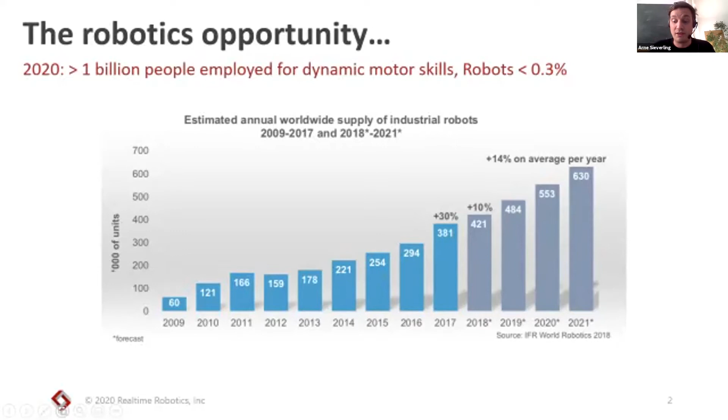If you now look at the actual deployment cost of a classical automation work cell, let's say a cell doing a step in building a car, the majority of that is actually integration. It's people that write the software, write the robot programs to solve a very specific task. So the normal workflow of these applications is done by companies called integrators, specialized in just that, getting these robots together. They design the environment and create high-level task plans.

Then they create motion plans, usually manually by teach and repeat, just moving the robots into positions. They get those taught positions onto the robot program controller and test and iterate. The last steps here are more like an iterative process, because the real world usually is different than the designed environment you started out with. So these people go into the factories, run the plans at low speed, check for potential collisions, adapt the plans. This is all a very time-consuming process, and it requires a lot of specialist knowledge.

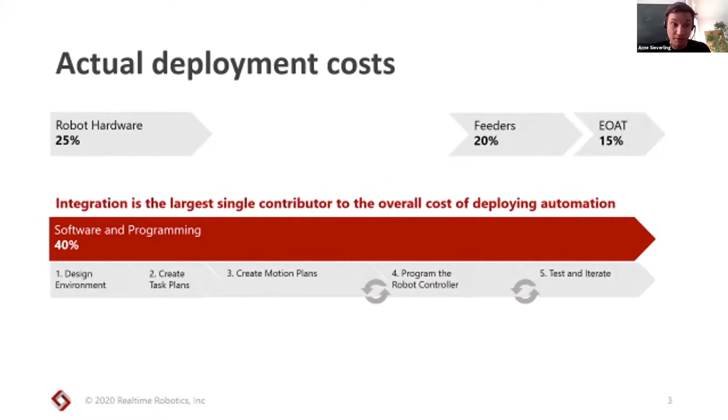Every industrial robot has its own operating language, so this all adds up to really high costs for integrating these work cells. So this is not really power on and go. You could say once the system is set up, it's power on and go - you press a button and it mostly works because it's doing the same things over and over again. But the process to get there is far from power on and go. It's very costly, it's very involved.

Now, if you would ask us researchers, okay, how would that process look optimally? It would probably just be simple: you design the environment, you specify the task. Then some system optimizes how many robots you need, where to place them, in which order, and how they should move. Deployment should also be smarter than just getting an engineer there to adapt until it works. The robots should be aware of the surroundings - they should perceive changes in the world from what they started up with, and adapt their plans automatically.

I'm going to mostly focus on step 3 here. However, at RTR, our bigger picture is to work on that whole pipeline and making the setup and running these work cells a much easier process using all the years of robotics research.

A key to deploying these robots is making them more reactive and adaptive to changes in the environment. They need to perceive the environment and instantaneously adapt plans to changes. This instantaneously is important - planning must basically be latency free. If planning takes half a second and every robot in your production line needs half a second every time something changes, this just adds up.

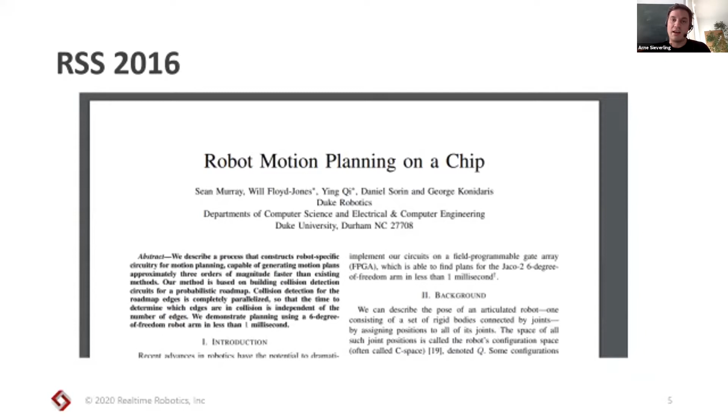And if you cannot prove that you're not hurting anyone, it's probably of no use in industry. So the idea of real-time robotics basically started with an RSS paper, and that was also 4 years ago. It's called Robot Motion Planning on a Chip, and I'll walk you quickly through the basics of that one. So it was back then a team of researchers at Duke Robotics, and they came up with an idea to extremely parallelize the collision checking part of robot motion planning.

So the general idea is based on probabilistic roadmaps, and usually these roadmaps work like this: you sample random configurations, and then you incrementally build this network of collision-free motions until the network is dense enough that you find a path from start to goal. And in the RSS paper back then, this process is split up into 2 steps.

The first step is offline - we create and construct a really dense, large roadmap, and then we aggressively pre-compute all the swept volumes. These are basically the volumes that the robot will sweep through when it does a specific motion. And we just discretize this and save these.

And then online, what you do is you just compare the sensor data to the pre-computed swept volumes. So this is basically like a logical comparison for any edge in my roadmap: do I have any voxels that collide with the voxels I'm getting from a point cloud, for example? And you do that online, the comparison. So red are now obstacles, new obstacles you didn't have initially. These obstacles would invalidate a few motions, and then in the remaining graph, you would do a shortest path query.

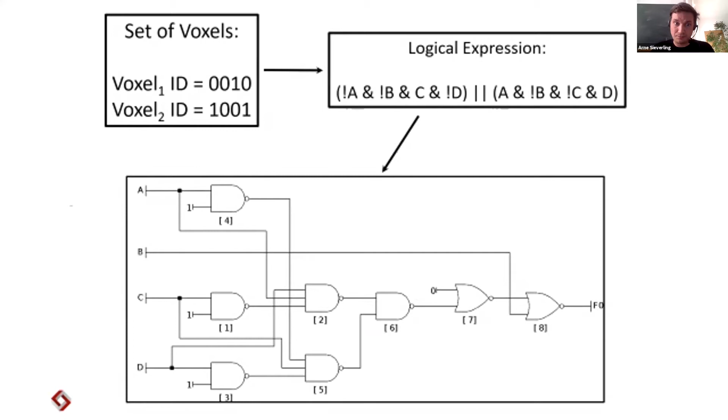Now, the idea is to make this logical check, this voxel comparison - basically it's a logical expression, and you can write it down and bake it in hardware. You basically have an FPGA, whose only purpose is to evaluate this logical expression for huge roadmaps. We're talking about up to 1 million edges at once. So the idea is really to have dedicated hardware to do this collision checking fast and then exploit this parallelization as fast as you can.

And this is really interesting for industrial applications because it basically makes motion planning a deterministic process. So in a given very short time budget, I can tell you for all of a pre-specified set of motions, which ones are free and which ones are colliding. And this allows basically triggering planning as part of a feedback loop. For every new sensor data you get, you can completely start to plan from scratch because it's such a short operation, basically.

So the remaining question is, okay, we need to pre-specify these roadmaps - they need to be known in advance. How can they be created? And there's a lot of research on how to sample to get good roadmaps.

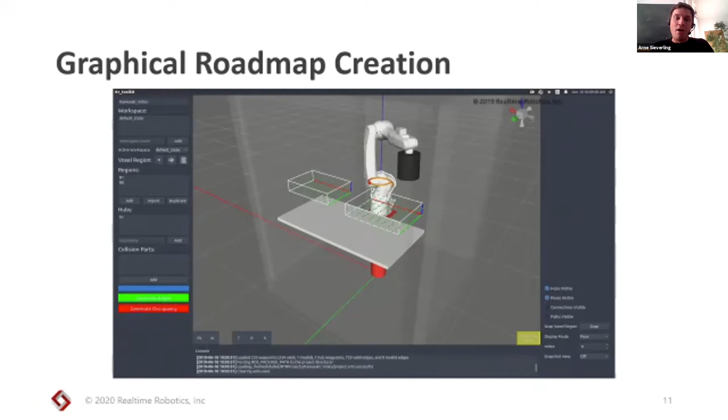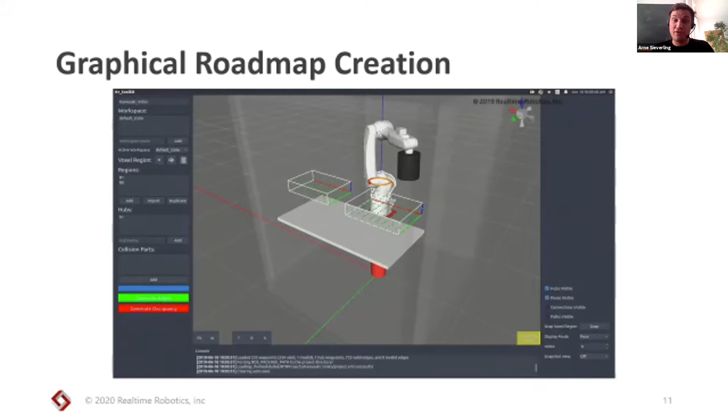We actually ended up with a much more user-driven approach. And the idea here is that robot programmers usually have a pretty good idea about where their robot is going to move and which regions of the space they're interested in. So this is our software toolkit, which is basically like a graphical programming tool that allows users to specify regions they're interested in.

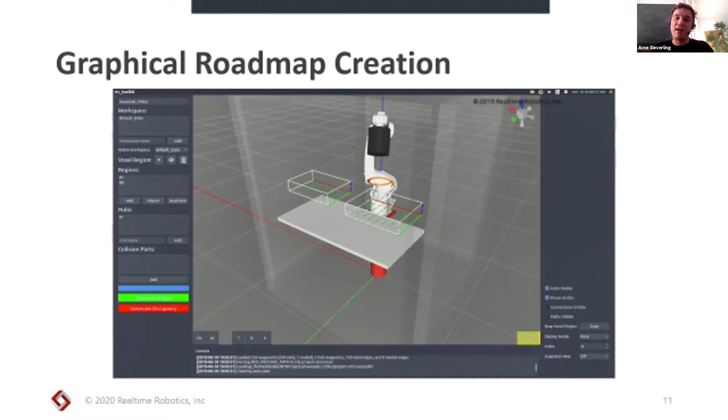For example, here on the table, you have denser regions with denser samples, and then you maybe have a few waypoints because you want to do the task in different ways. This toolkit then automatically creates connections, starting local motion planning problems to find connections between these points and computes all these swept volumes.

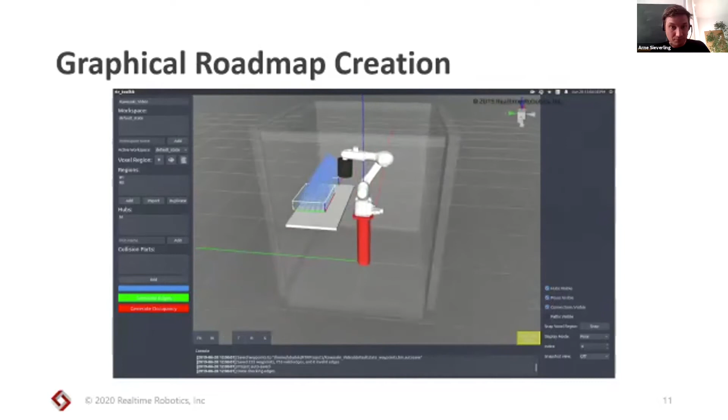And this is all happening offline before you actually run the application. So this is basically a way to get the robot programmer's knowledge about the task and bake it into our hardware. The robot has different options to do a task, but it will still be among a very defined set of motions.

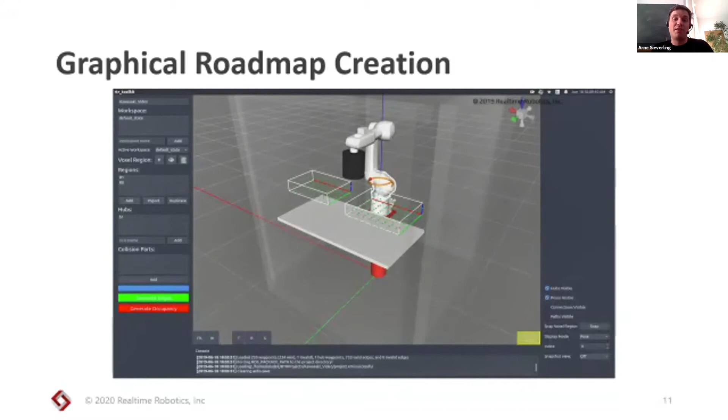This is a bit different than motion planners that give the robot complete freedom. So from this idea came our core technology, and the same idea is still in the product we sell now. This is basically two products. On the left side, it's what we call the real-time controller, an industrial PC with exactly that custom motion planning hardware inside. It comes together with a software toolkit to create these roadmaps graphically. On the right side, it's what we call RapidSense—that's the spatial perception part of all that. So now that you can plan amazingly fast, you also need something that gives you good enough sensor data at high update rates so that you can actually make use of that and adapt your plans.

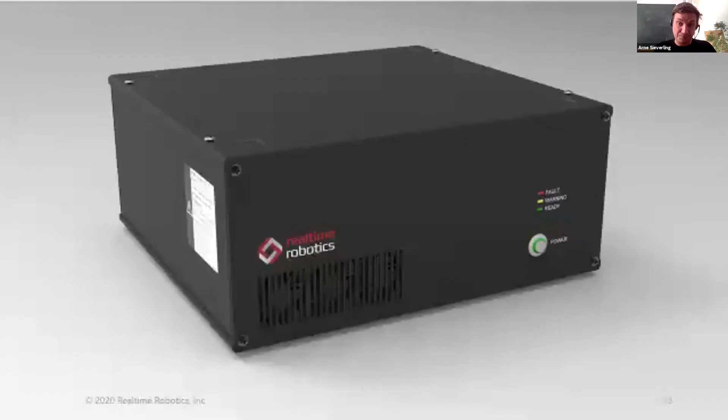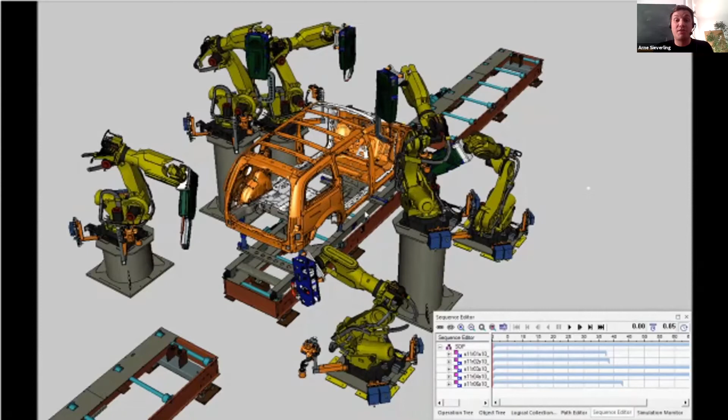And applications we're tackling are things like this: industrial robots on a tight space doing complex tasks, and all these robots must avoid each other, and you must guarantee that they stay collision-free. The idea now is to use this online planning for multi-robot planning. What you basically do is pre-compute this swept volume for all your motions, just like before. Then whenever a robot moves, they just reserve the voxels of this swept volume for the motion they want to do, and these volumes are then obstacles for all other robots. So the other robots just plan the path around the motions the other robots would do.

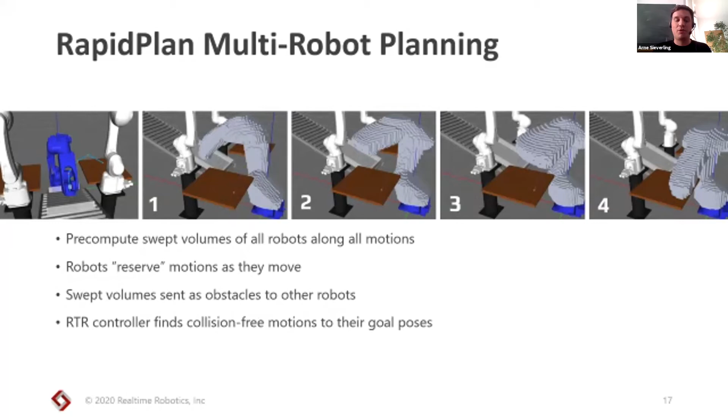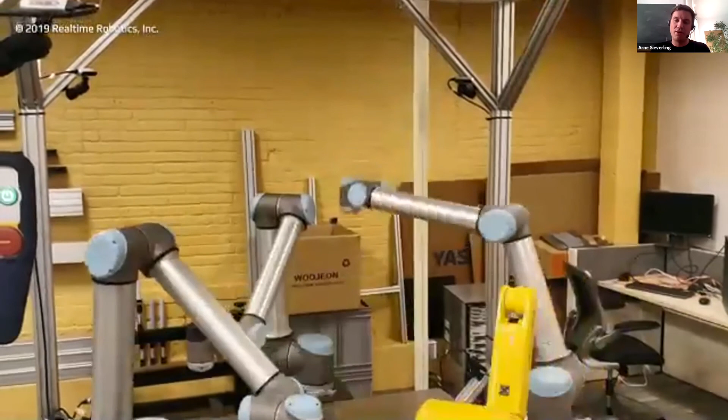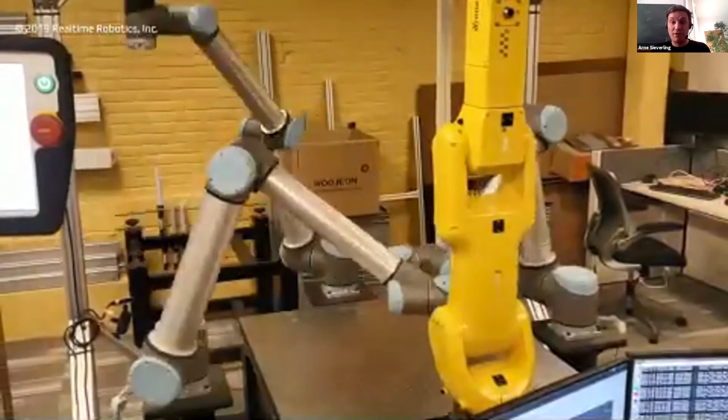How does this look like? This is a simple toy example, basically stress testing this approach. You see 3 or 4 robots running at full speed, and they basically randomly choose a point in their workspace. Then if there's a collision-free path to go there without colliding with the other robots, they just go there. And if there's no collision-free path, they pick the next point. So all of these robots are just running a simple 3-line script, and all the higher level coordination—there's no single coordinator running here.

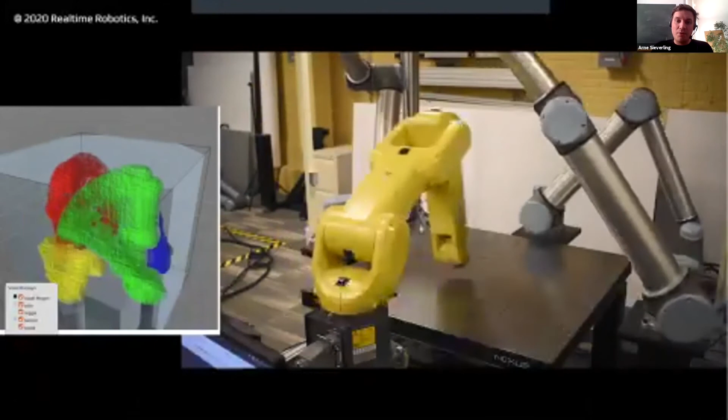They're basically all acting individually in the space of collision-free motions. Here's the same, a bit slower, and on the left you see the volumes that all of these robots block in their motions. What you see here is that the planning time, the time for the robots to make decisions, is basically non-visible here. We plan within milliseconds, and this is crucial to get such a good performance here.

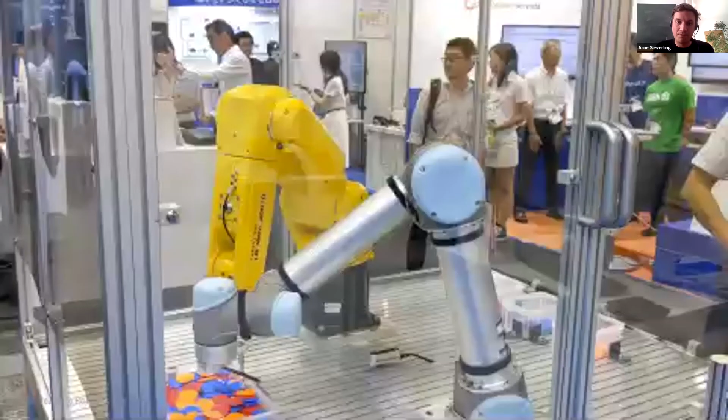This is the same idea in a bit more industrial setting. An integrator implemented this for a Japanese trade show—basically 2 robots picking and placing, and at the same time they avoid each other.

And coming full circle, this is a very valuable technology for industry, and we are cooperating with Siemens. They're the leader for industrial simulation of these manufacturing work cells. There's a software called Siemens Process Simulate, and this is the standard for setting up these work cells. Our technology is on the way of becoming basically a plugin to the simulation environment. These integrators now can use our technology to very quickly come up with plans where all the different robots avoid each other. This was also already used by integrators who could reduce the time-consuming task of programming and defining zones where a robot cannot be at the same time. It's usually a pretty involved process, and they could reduce all that by up to 70%.

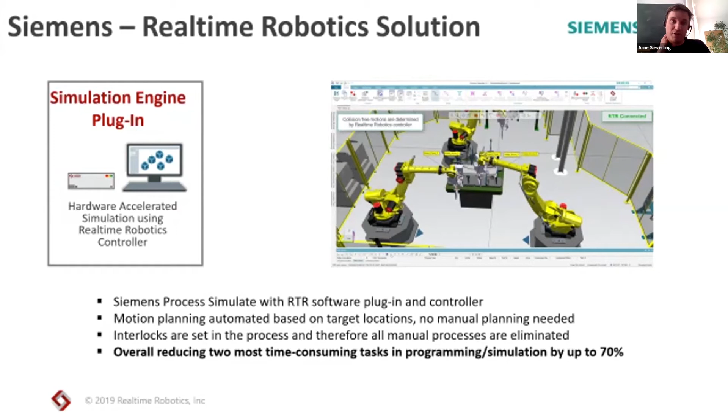Okay, so on the other product is what we call RapidSense, and that is concerned with actually generating data so that robots can perceive changes in the real world, and actually use the perception of the real world to adapt their plans instantaneously.

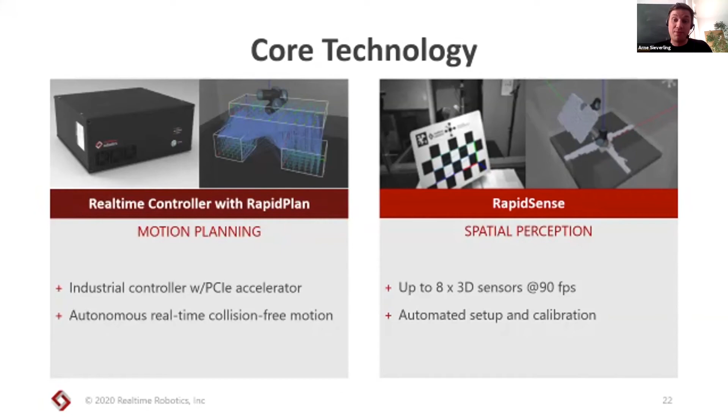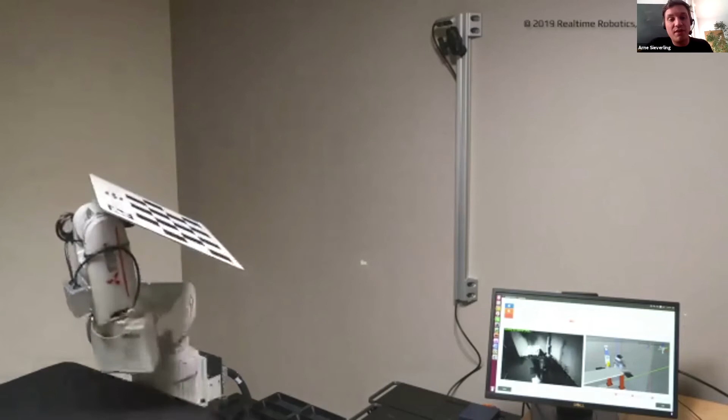And our system is based on a number of RGBD cameras. So we take up to 8 RealSense cameras here and merge the data to receive a really dense and good high-resolution point cloud. The tricky part here is usually always calibration.

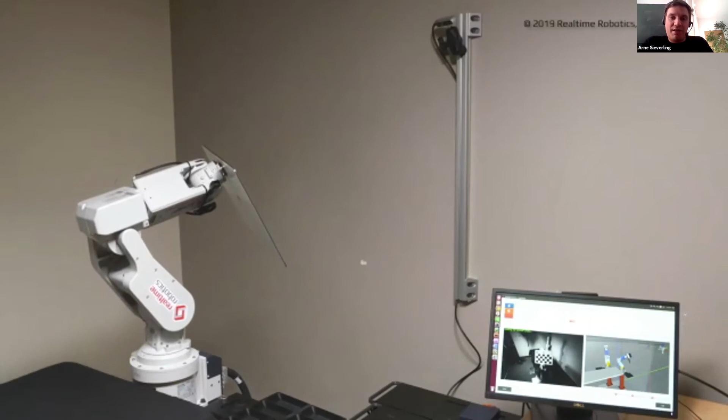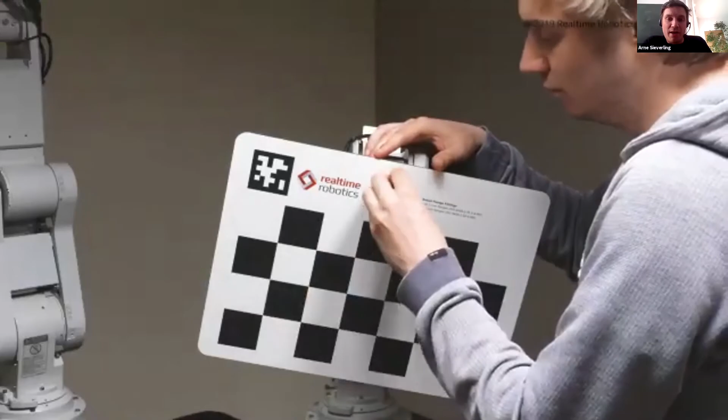Calibration is a painful process. What we can do here is really exploit that we have robots in a work cell, so the calibration becomes almost fully autonomous. It just requires mounting a fiducial plate to the robot, and then our planner comes up with good viewing positions and also collision-free motions between these viewing positions.

And here you see the data these sensors generate.

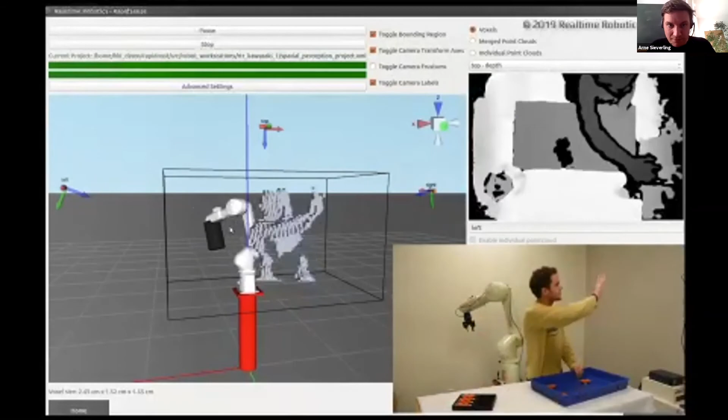Here you see the system in action. It's running still at the original maximum frame rate of 90 frames per second, combining the data of 8 3D sensors. And setup and calibration, as I said, is mostly automated, so the only input needed is the first initial view of the fiducial plate, and everything else happens autonomously.

And it's able to detect free, blocked, and also occluded space, because you need to reason about occlusions. Otherwise, you might collide with things you're not seeing.

A technical challenge here is really filtering out first the robot, but also things that are not well modeled beforehand. For example, every industrial robot usually has large cables attached to it, and these are really hard to model analytically, but you need to find a way to filter them out of the voxel stream. Otherwise, the robot will see itself as an obstacle.

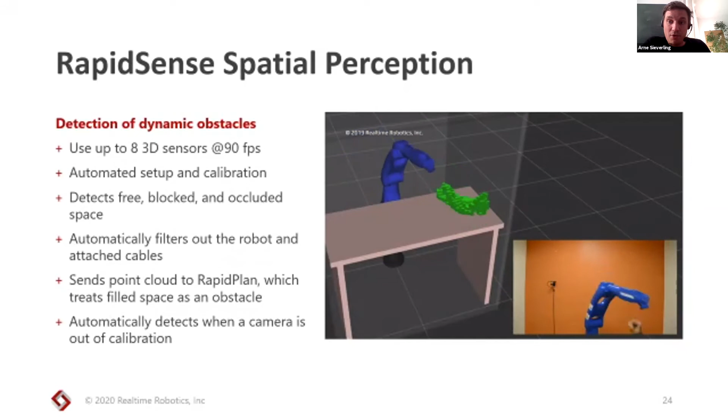This data is sent to our online planning system, and at this 90 frames per second, the system can also come up with a new collision-free motion plan continuously.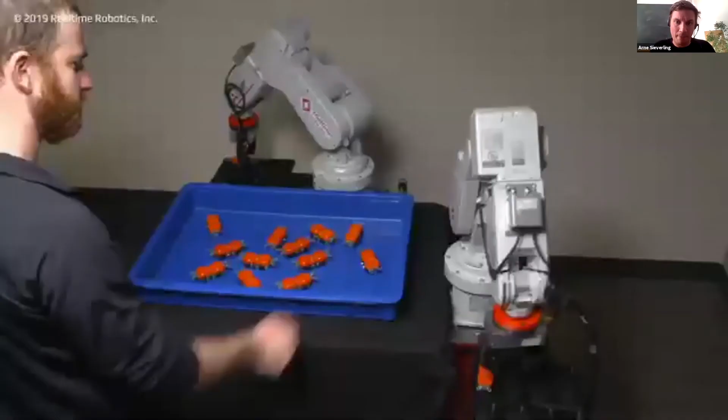So here's a video of the system in action. It's combining both the multi-robot capabilities and also the spatial perception capabilities. If your video is very laggy, you can also go to our webpage rtr.ai and basically see the same videos, because the robots are moving a bit faster.

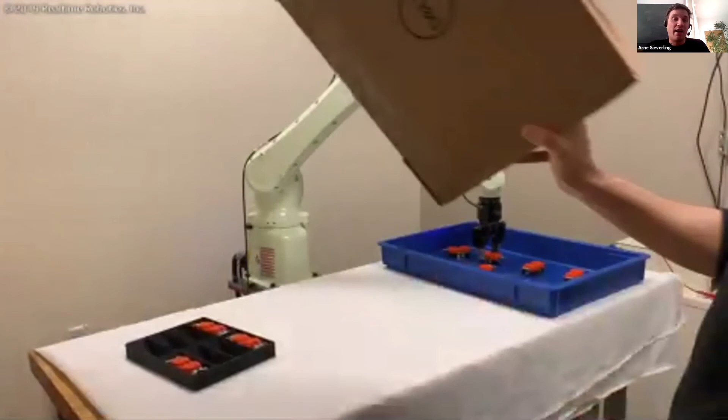So you see that the planning system allows you to change target location, for example, instantaneously, and there's no visible planning time. And also, if you add obstacles, the perception system picks it up instantaneously, and the planning system immediately finds a way around. So we're planning at 90 frames per second here.

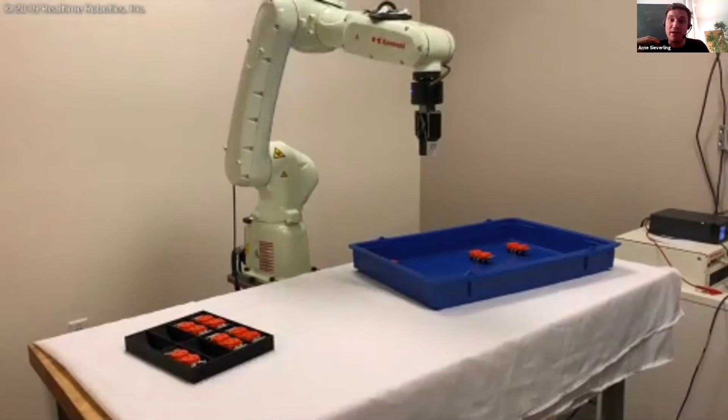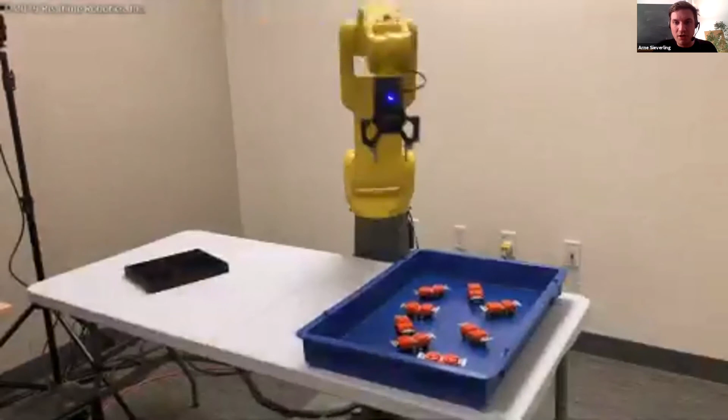And the next video that's coming also shows a bit about the reactivity of the system, so you can try to make it crash. It's really hard — the robot perceives obstacles fast and immediately stops. You also see that if the roadmap contains enough options for a robot to move around an obstacle, it will immediately move around.

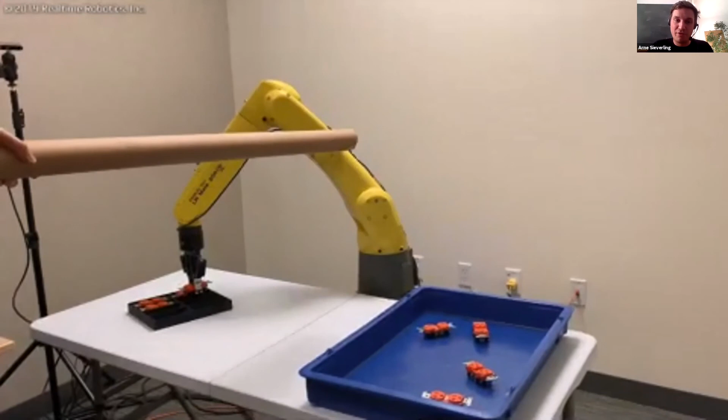So this concludes our view at Realtime Robotics about what I today call power-on-and-go automation, which is basically this process of not fine-tuning, not orchestrating motions individually, but using real-time motion planning technology to, on the fly, come up with collision-free and good motions.

And yeah, the process here is building and configuring robot work cells graphically. There's a large part of optimization, and this is basically the question of where to place robots, how, in which order should they do tasks, and there is exciting stuff from us coming soon, so keep watching out for that.

And then the question of how can we deploy these robot cells in a more robust way and let them automatically adapt to changing environments? And yeah, our tool of choice, real-time motion planning, has helped to make these things really reactive and really robust and fast.

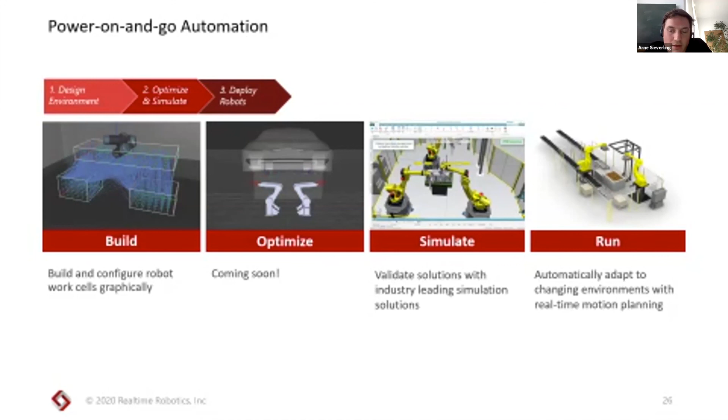So for the first one, we're working on initial prototypes to get our system running on mobile bases. In general, there's nothing that speaks against using these technologies with the extra 3 degrees of freedom. It needs to be seen if you can boil down what your mobile manipulator should do to a roadmap like that. But what you easily can do is move a base around, and then it's just the changing environment that the planner needs to deal with. So this is definitely a feasible solution also for mobile manipulation systems.

And the second question, oh sorry, I need to hear that again. It's just whether, if you have multi-robot systems and they're not maybe in direct communication, like in the video you showed, can you get optimal or near optimal trajectories for those systems? Or is it just a best plan first type of approach such that collision is avoided?

So you can seed the algorithm. Whatever you do offline, you can try to be optimal, and you can basically seed it with motions that are almost optimal. But at runtime, you basically need to instantaneously decide what to do. With the latencies we're talking about here, if you want to plan in a few milliseconds, there's no time to go close to an optimal solution, especially in a multi-robot setting. So what we're doing here is not optimal, but we're talking about motions that maybe take half a second at maximum, usually gaining by not wasting time to plan.